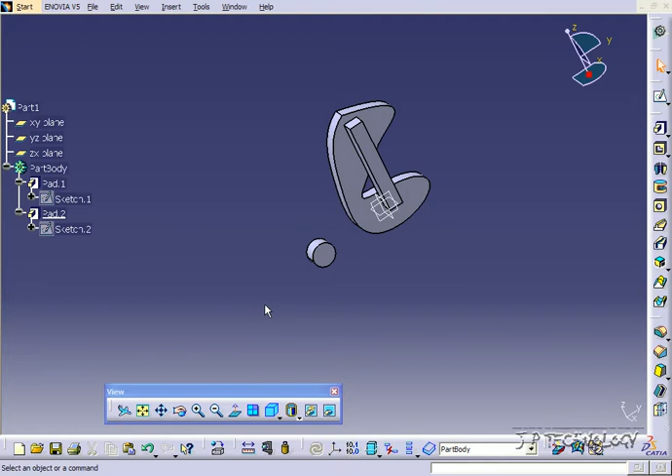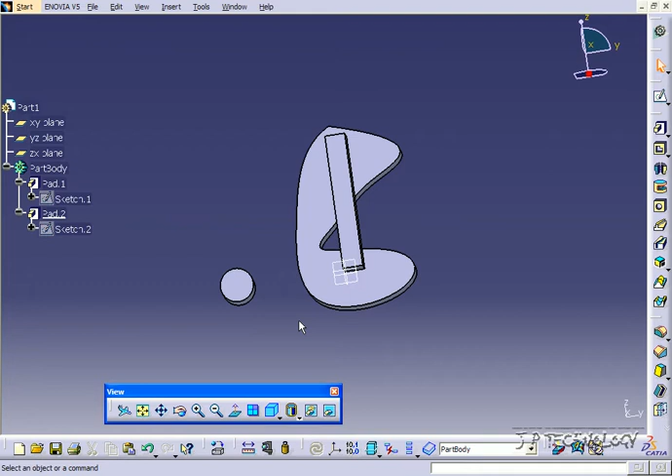The shell feature can be found on the toolbar, or you can go to Insert, Dress Up Features, and click Shell. The shell feature is kind of like the thickness feature when you extrude. It creates a hollow body inside, and from the shell feature you're able to create a part and make a mold or a cavity that part would fit in. So to start off, let me show you how to go through it and select the options.

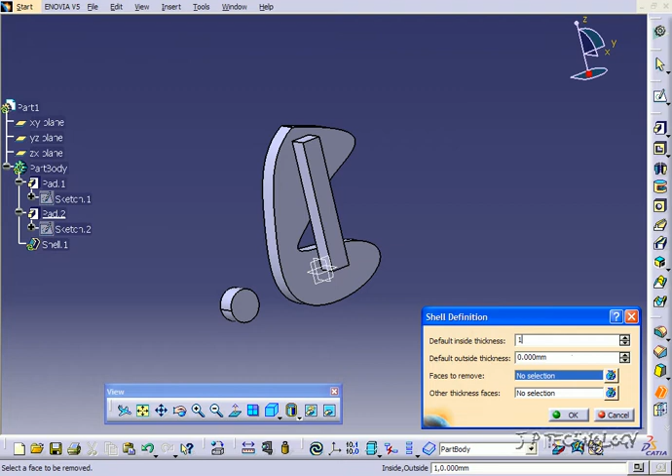So we'll click shell, and what it's going to ask you to do is click faces to remove. Each face you click is going to be removed, and then the inside thickness is how thick your part's going to be after. Let's change this to 10, and let's click this face here.

Click OK, and then you're going to notice that it's cut out there and that the thickness is 10, and everything else in here is hollow. If I click on there, you can see the profile within there is all hollow.

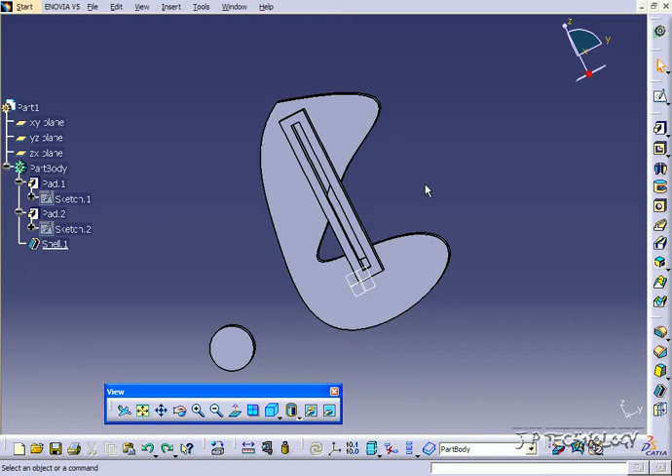Now if I press Ctrl Z and delete this one, we'll do the same shell, but we'll only do 1 millimeter. Click this face, and now you can see again how it cuts through and how it goes through this body also.

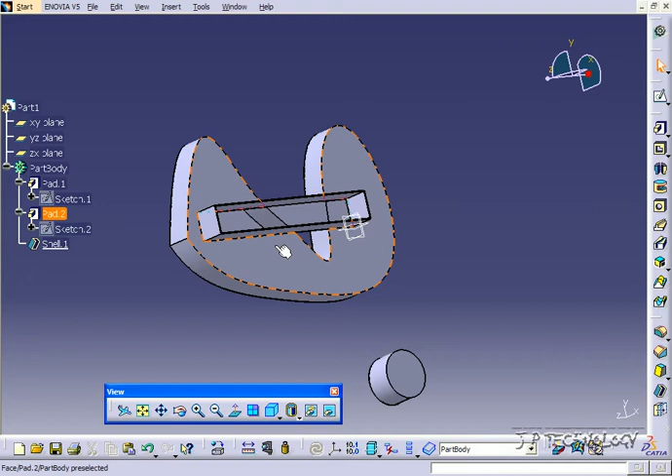So the shell feature, when you're trying to shell out a part, allows you to create that shell inside of the part without going through and remodeling everything. It's a real big time saver, and it's a very powerful tool for you.

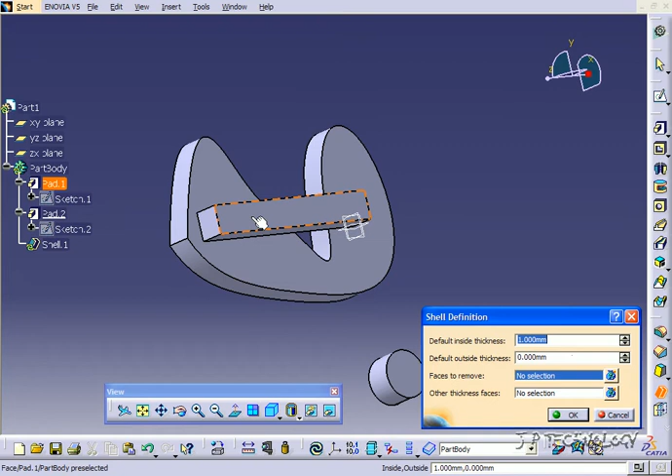Now if we delete this shell, and I'll do another one, the two options here show an inside thickness and an outside thickness. Now what we've been doing is just eating away from the inside. Say this entire part we wanted to make a mold for it, what we'd have to use is the outside thickness. So let's make this 0,

and let's make this one here 2. Now we'll click this face here, and rather than having an inside thickness there, we're going to have it on the outside. So everything's going to move out.

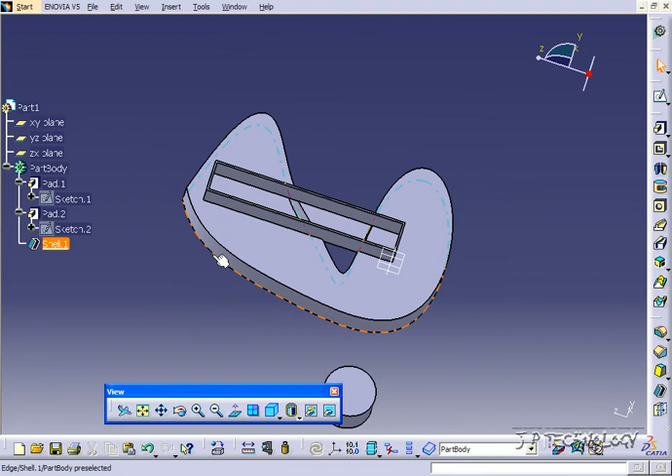Click OK, and you can see how the entire part moved out, and the original part that we had would fit inside of this cavity that we've just created. So you can see that we have a cavity there with a 2 millimeter thickness.

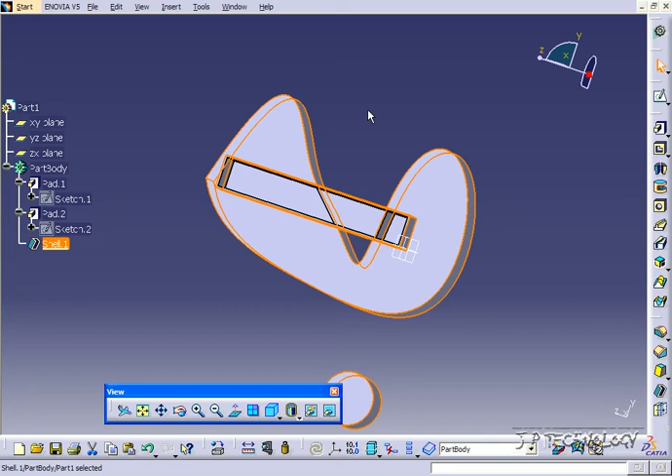So with the shell feature, you're able to make molded parts. If you have a part, you're able to shell and make the negative for it. So it allows you to use, like I have here, I made a unique profile and design, not something that you would want to go back and slowly create a minimum thickness for and shell out. So using the shell feature, it allows you to create that negative quickly and easily.

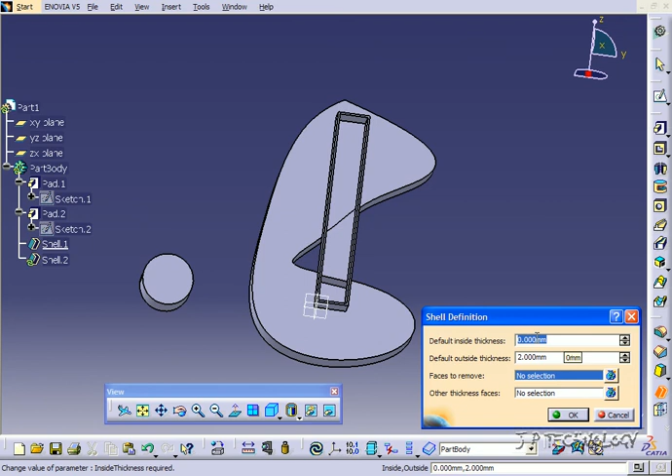So again, with the shell feature, you can either do an inside thickness that's just going to add thickness to the inside, or you can do a thickness to the outside. When you do it to the outside, the original shape that you had is going to be able to fit into that body that you just shelled with the outside thickness.

And again, you're able to remove multiple faces, so I'll click this face here and this face here, click OK, and it shelled it using those two faces.

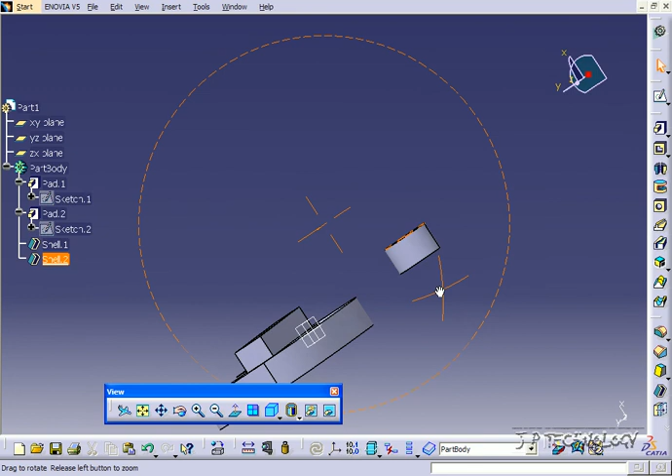So it's all up to you how you want to use it. It's a very powerful tool. The more practice you have with it, with parts that you've made by trying to shell them, the more understanding you'll have. So the more you practice with this tool, the better you'll be at it.

And this concludes our tutorial on how to use the shell feature within CATIA V5.